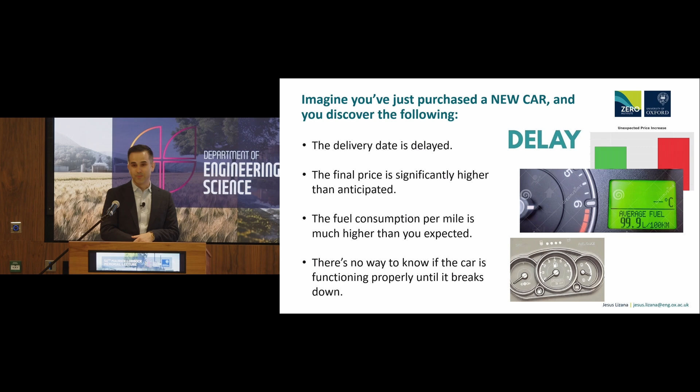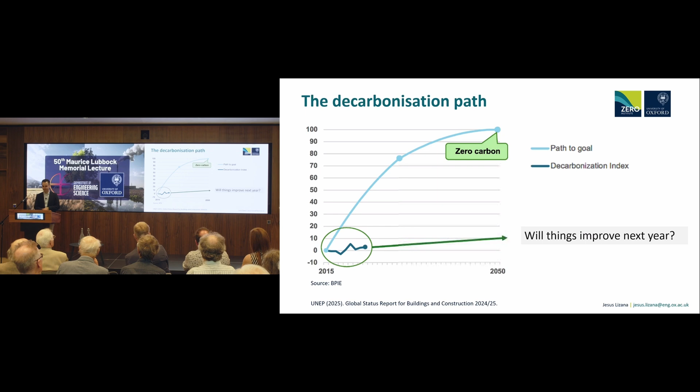Welcome to the building sector - probably the worst sector to decarbonize. We are not even close to the right path to reach net zero by 2050. We didn't even start. So will things improve next year? Sadly, the building sector is responsible for a third of carbon emissions globally: 27% related to building operations, what we call operational carbon, and 10% related to materials and construction, the embodied carbon.

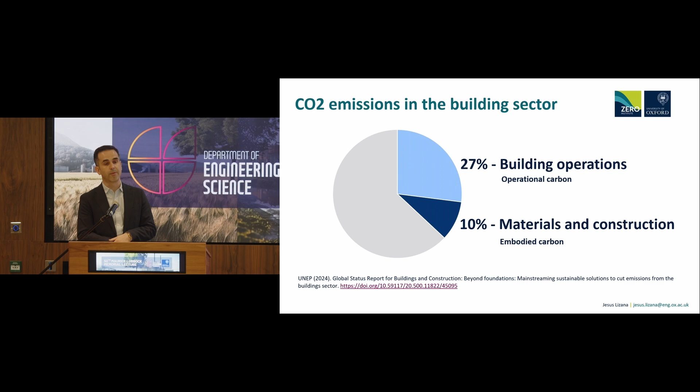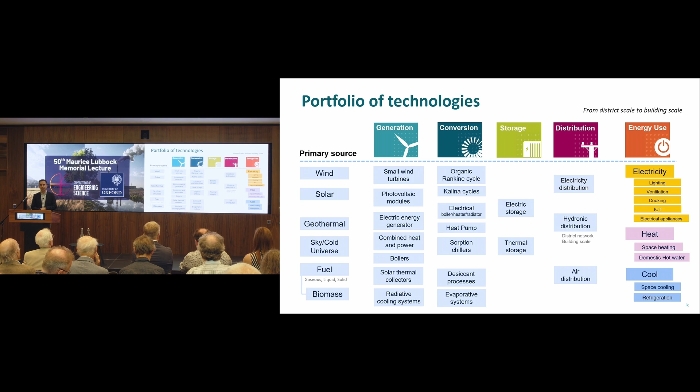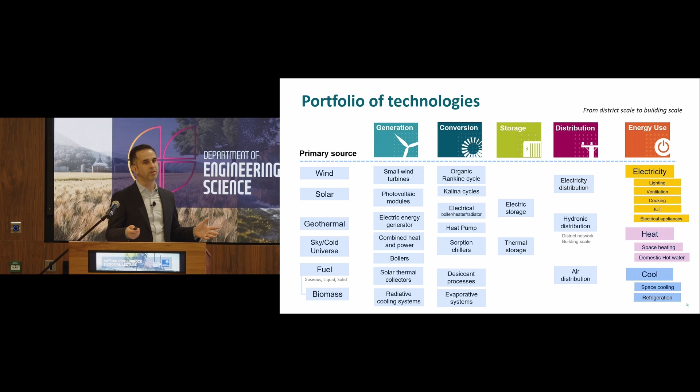What is the role here of building services engineering in achieving net zero in the building sector? We have a large portfolio of technologies that we can apply: for generation, conversion, storage, distribution, and energy use, for electricity, to provide heat, and to provide cool. But is it just about one technology? Is this going to solve the problem? If we need to talk about one technology, probably heat pumps will be the one we are all talking about - it's the technology with the highest efficiency, probably the most promising technology for heating and cooling in the building sector.

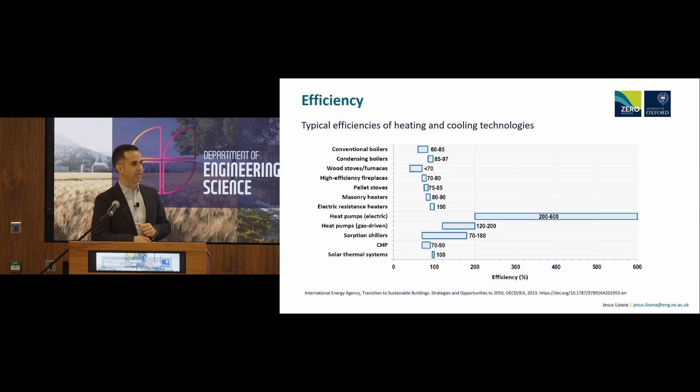Of course, as an academic institution, we have the role to share best practices with our students. This is something that at the Zero Institute we know well, and we are starting. We started last year introducing new courses, new lectures, not only in engineering but other MSc programs in engineering and geography, and even planning field programs and executive education. We also are creating educational resources, publications, software and tools in order to promote education, to train the future engineering leaders for net zero.

At the same time, we are motivating students to try to develop innovation in the sector. Now we have three fantastic students representing the UK team for the European competition on zero carbon data centers, where I hope that they will win. They will submit the proposal in July this year.

This is an initiative that we started last year and was globally recognized by the two major chartered institutions on building services engineering. First, CIBSE, the Chartered Institution of Building Services Engineers, based in the UK, with the CIBSE Award 2025 in Learning and Development, and also by ASHRAE, the American Society of Heating, Refrigerating and Air-Conditioning Engineers, with the ASHRAE Award for Zero Carbon Education.

But is this enough? Are the best practices in the building sector enough to be net zero? Is it just a question of investing, of sharing knowledge, or implementing best practices?

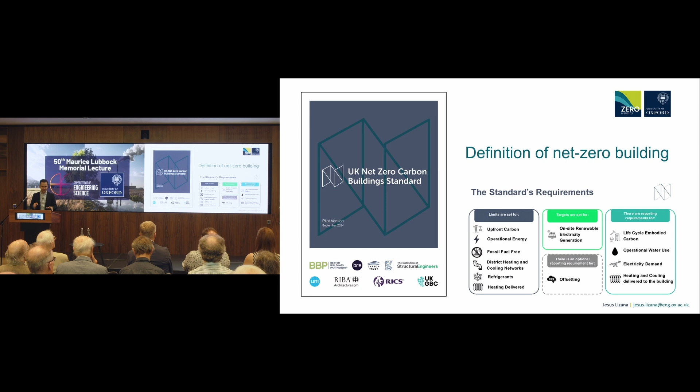Before going into detail to try to answer this question, what is a net zero building? We have a new standard that defines the limits, targets, and requirements that we need to meet in order to align the building sector to the UK net zero strategy. Something interesting about this standard is that we don't need to eliminate carbon emissions.

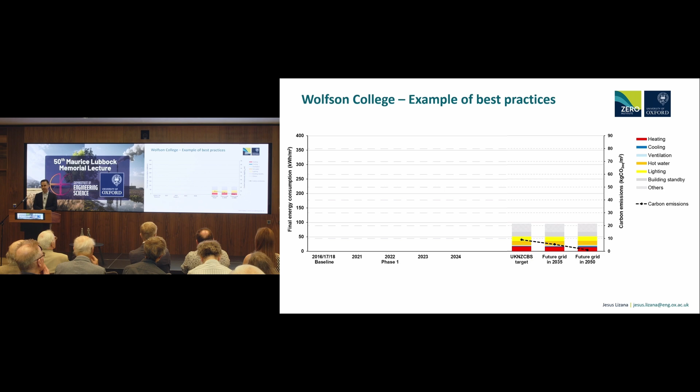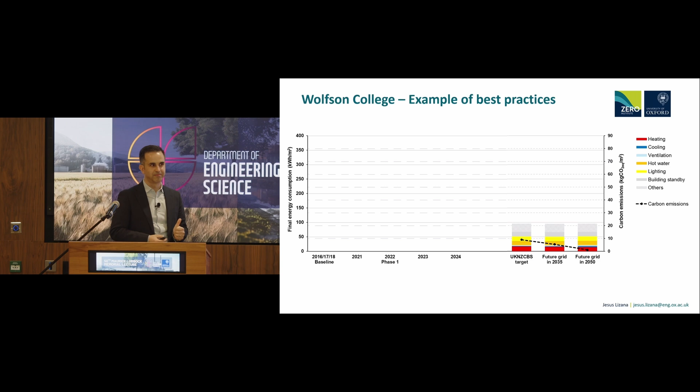How much is the consumption of a college in Oxford? Do you have any reference value? Of course, lower than 400.

Wolfson College's baseline was slightly close to 350 kilowatt hours per square meter. This is an average across three years. 2021 - what happened? COVID. So the starting point of the intervention wasn't really there; it was in 2022.

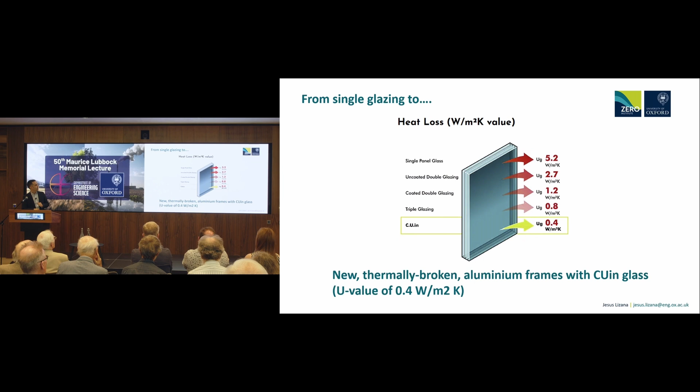And here we selected the two best practices in order to decarbonize: building fabric and the best heat pump technology in the market. Building fabric, in this case - this is a brutalist architecture - most of the building envelope is glazing, so we used the best glazing technology in the market, able to reach a U value close to 0.4. And the best heat pump technology, we have a heating capacity of 2.4 megawatts.

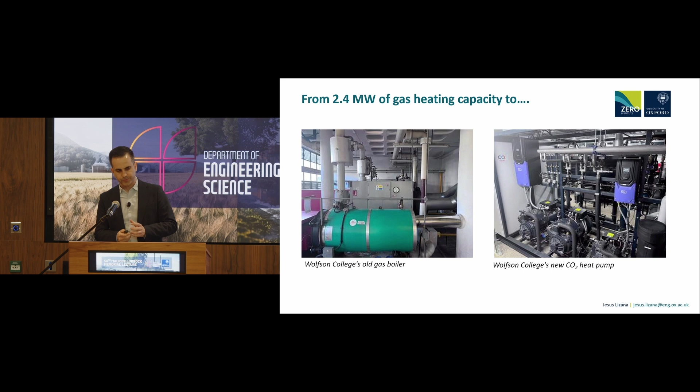We were able to electrify using two CO2 heat pumps with a total capacity of 700 kilowatts. Do you think that we are close to the target? How many of you think that we are below 150?

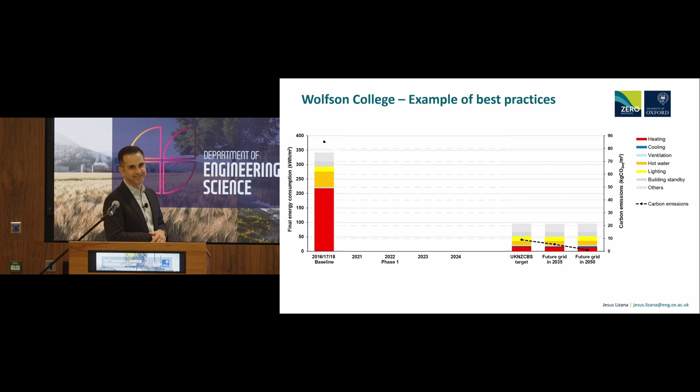Come on. Well, in 2021, as I said, COVID and the lockdown led to a decrease in consumption. In 2022, we started the decarbonization project - of course, at that time we still had gas. We finished the decarbonization process in 2023. 2024 was the reference year where the building was working fully electrified, only with the heat pump, with no more gas.

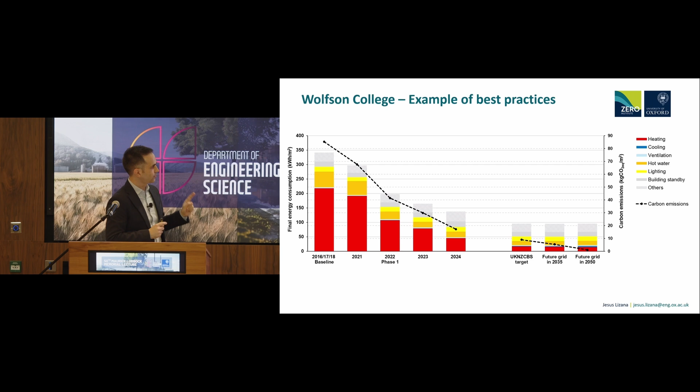What can you see here? Massive investment, very complex project, best technology - not enough. So the best practices alone will not get us to net zero. So what can we do now?

Of course, here is where, as a research institution in the Zero Institute - this is the program I'm coordinating on zero carbon heating and cooling - I have research on new materials and technologies to decarbonize heating, to understand how climate change is going to impact heating and cooling demand globally, and at the same time how to define ultra-low-cost cooling technologies to support climate adaptation.

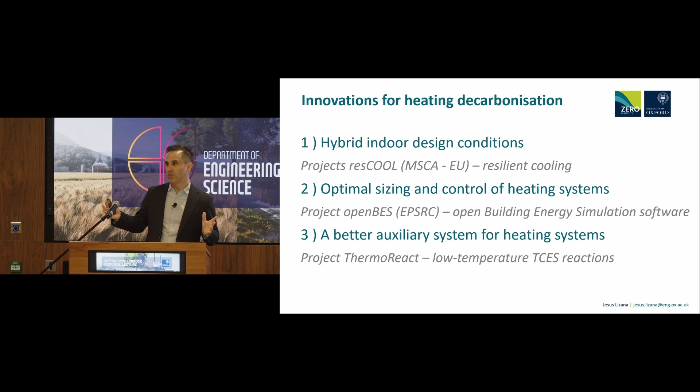But here I will focus only on climate change mitigation, on heating decarbonization. This is the hot topic right now in Oxford and in the UK. And this is not research that I'm doing alone. Research over the last 10 years has collaborated with more than 65 international academic and non-academic institutions, with contributions from many of the colleagues working with me at the Zero Institute who are here today.

So briefly, the three most exciting projects. I am sure that you all have a home, maybe planning to buy a heat pump.

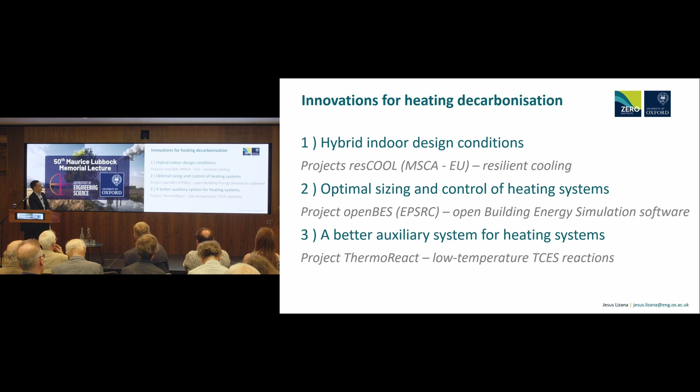I hope these three radical ideas can inspire you. The first one is hybrid indoor design conditions, a Marie Curie project we started two years ago. The second is optimal sizing and control of heating systems, a new EPSRC project I started last year, and a better auxiliary system for heating systems. I am going to go through them.

The first one is about this key message: thermal comfort is not only temperature.

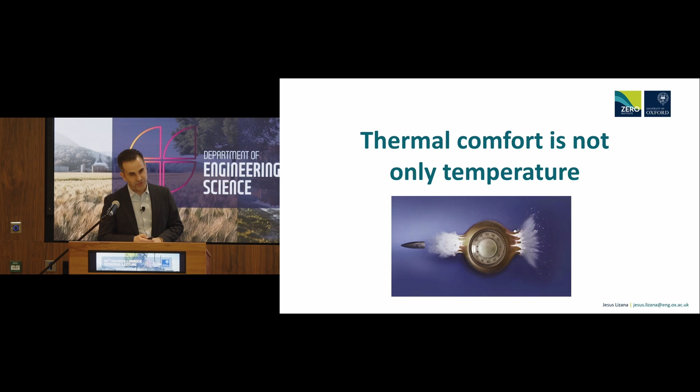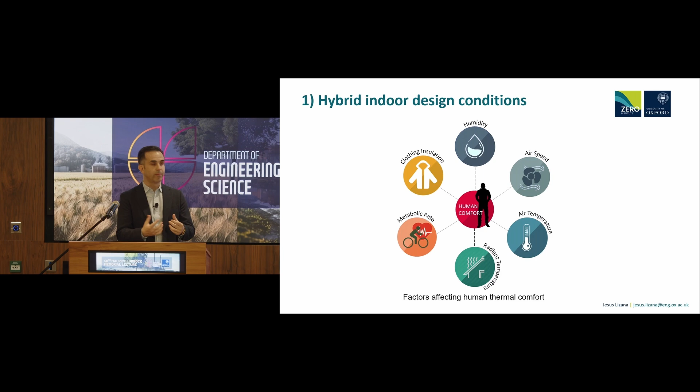We traditionally address heating by modifying the dry-bulb temperature, the temperature we see on a thermostat. But there are six thermal comfort variables we can use: humidity, air speed, air temperature, radiant mean temperature, and two personal variables: the metabolic rate according to activity, and the clothing insulation, the layers we are wearing.

What is the opportunity? For every degree Celsius we decrease the thermostat, we can save between 5 and 10% of heating energy demand. This is huge. It's a huge opportunity.

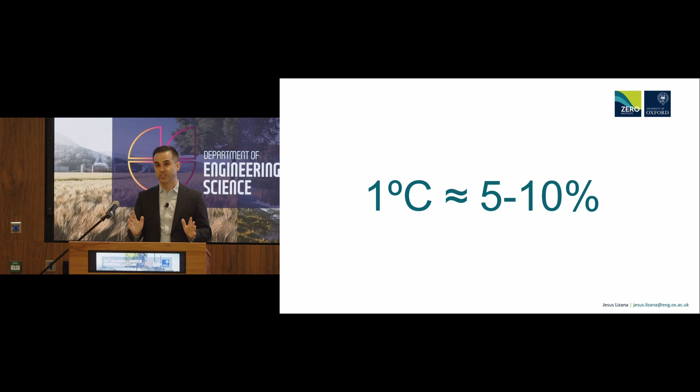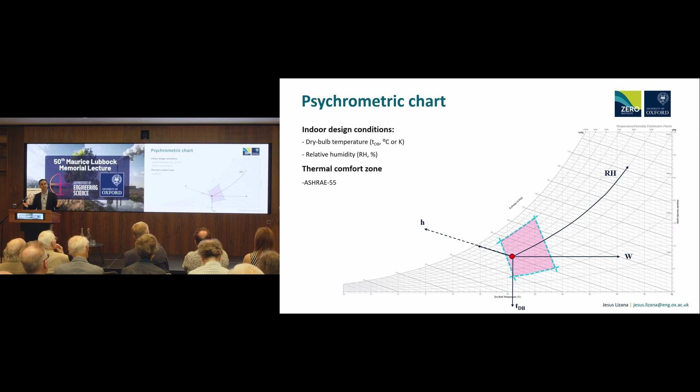Here we need to talk about psychrometry. Psychrometry is the part of engineering that studies the physical and thermal properties of moist air, a combination of dry air and water vapor. The psychrometric chart is the tool we use for sizing and calculating heating, ventilation, and air conditioning systems.

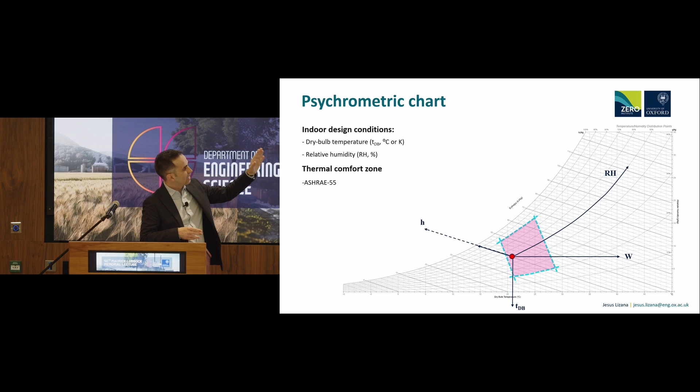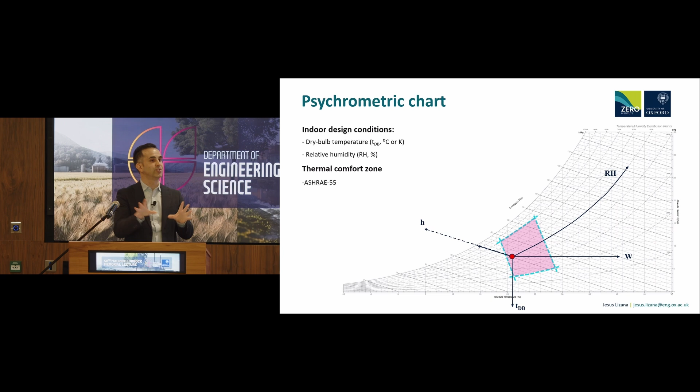On the horizontal bar we see the dry-bulb temperature, and the relative humidity as lines going up. The red point is associated with the indoor design conditions we need to meet for our heating system, and the pink area is the comfort zone, more or less where we may feel comfortable.

How do we calculate the heating system capacity? We need the outdoor design conditions. These conditions are related to a percentile of the historical temperature. For Oxford, minus 5.5 degrees Celsius, or minus 3.7 degrees Celsius, according to the percentile we are using and the building typology.

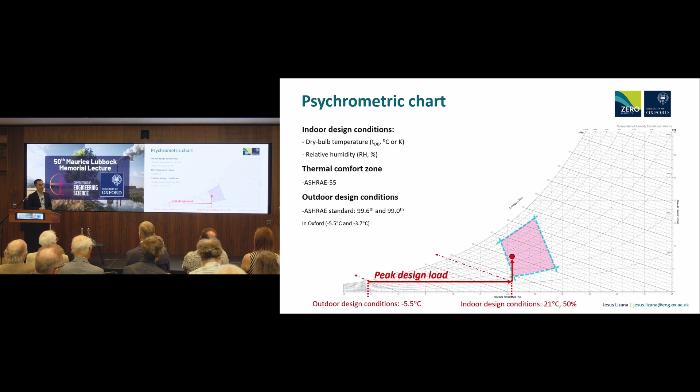Can we do this without sacrificing comfort? This will be super interesting, because we can reduce energy demand easily by 30%, and we can reduce the peak load for the heating system.

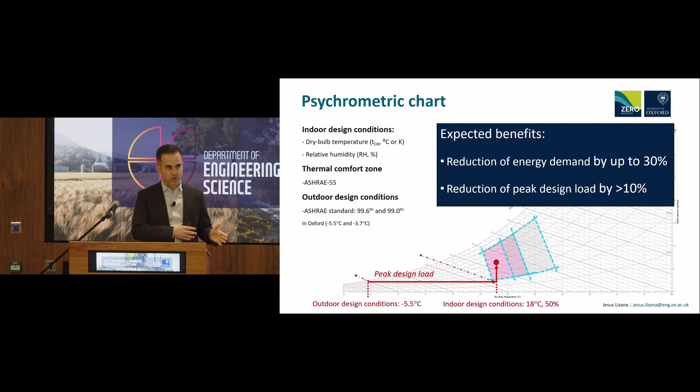But at the Zero Institute, we have a solution for this. I will explain.

What we can measure can be controlled. So first we need to understand how we can measure thermal comfort, and we can do it. We built a device that we can use to measure all the thermal comfort variables, using the predicted mean vote index.

This is not new, it's from the 70s. This is an index from +3 to -3 where we can characterize the thermal comfort sensation. Zero is the neutral zone, the perfect point, and the neutral zone goes from -0.5 to +0.5.

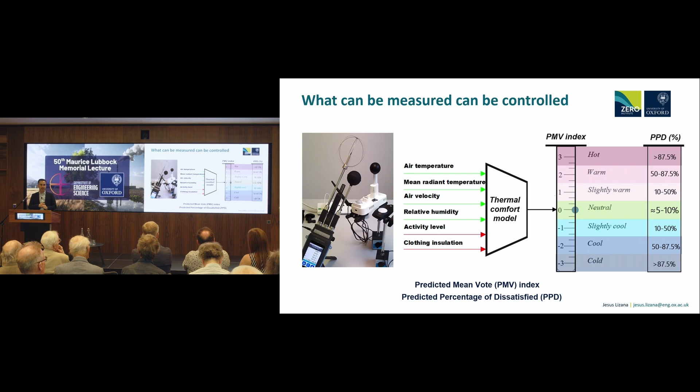Something interesting is that with this model we can also predict the percentage of dissatisfied people. So even in the neutral zone, 10% of people will be dissatisfied. We need to remember this.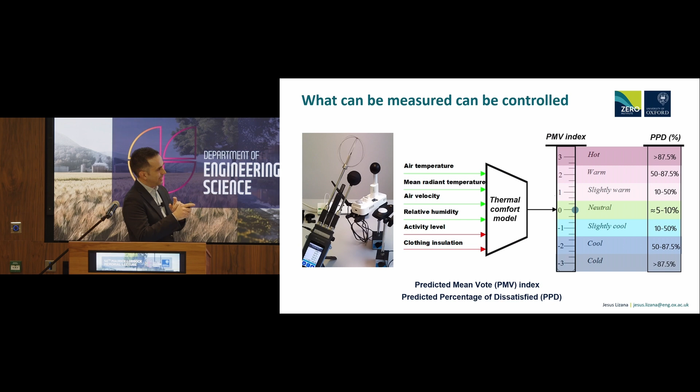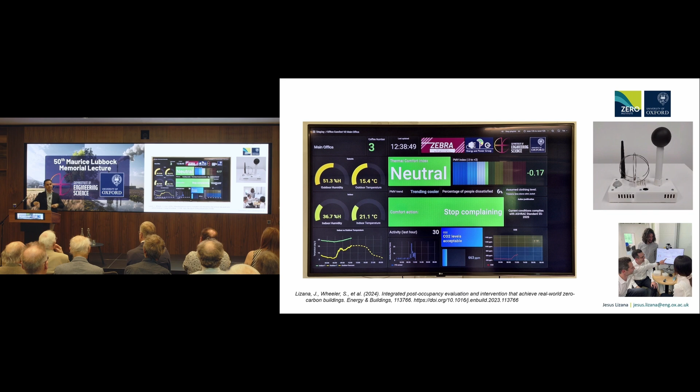So the second thing, after you measure, you need to inform these people: they have the right to complain, but not the right to modify the settings. That's clear. As soon as you understand you are in the thermal comfort neutral zone, you can start playing with the system.

You can move from the traditional approach to address heating to a hybrid approach. In the psychrometric diagram, now we can plot the thermal comfort sensation, and the white area will be the neutral zone.

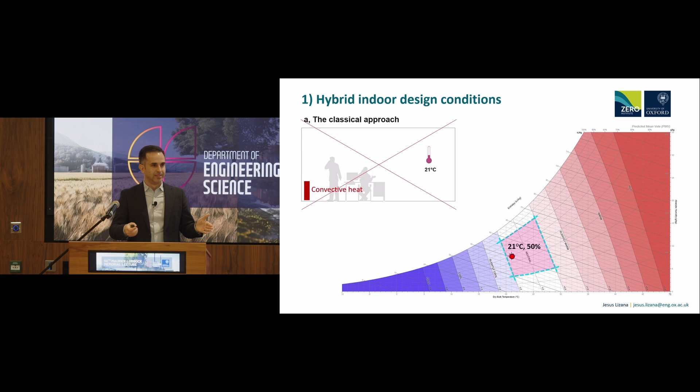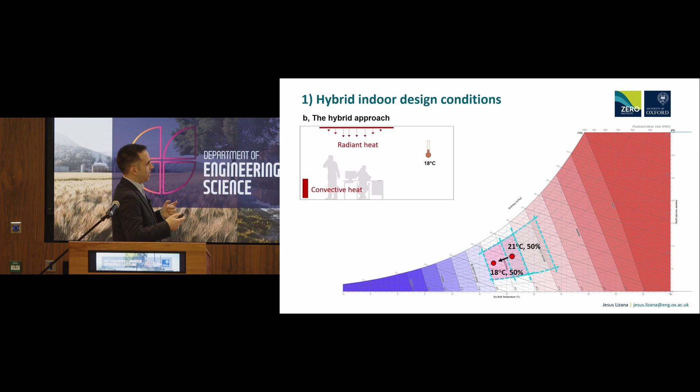How can we move from the classical approach to a hybrid approach? The secret is using radiant heat, for example introducing infrared heating. This increases the mean radiant temperature and moves down the neutral zone, basically reducing the dry bulb temperature at which we feel comfortable.

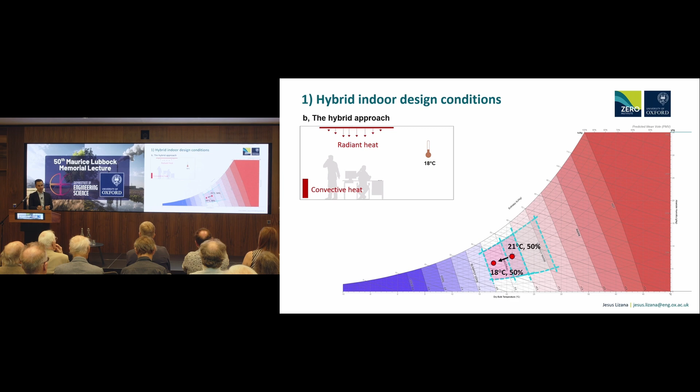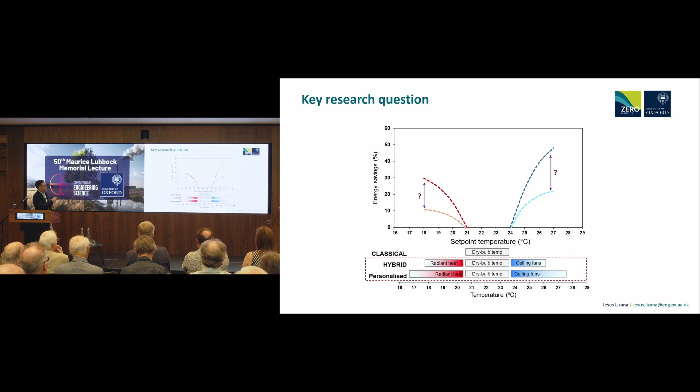And the opportunity is huge. Right now we understand there is a potential benefit if we move the set point temperature from 21 to a lower value. But we need to balance the consumption of this radiant heat to make sure there is a net benefit. This is where we are.

Do you know why in Spain we have siestas, naps, at the hottest hours of the day?

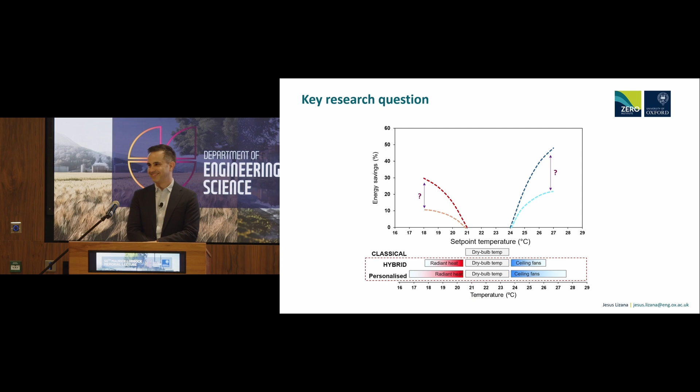It's quite fun. When we sleep, we reduce one of these thermal comfort variables: the metabolic rate. So reducing the metabolic rate, suddenly we are increasing the thermal comfort zone to a higher temperature. So when we sleep at the temperature that we feel comfortable, suddenly it's 27. So it's not because we are lazy, it's just because we need to reduce the metabolic rate. Remember that.

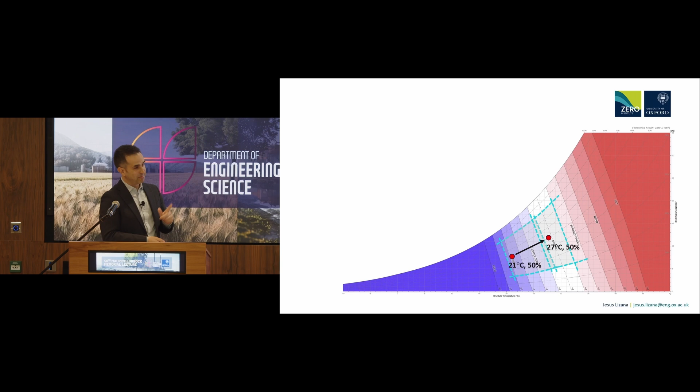The second project is about understanding this key message: it's time to stop over-engineering systems for managing peak loads. This is super important. After 10 years of experience in the building sector, we can see how energy systems for heating and cooling are traditionally oversized by a factor of 1.5 or 2, easily. With gas boilers, this was not a problem, they were cheap. But with heat pumps, this is a huge problem, the price is 10 times higher. So we need to optimize, we need to calculate well how we design heating systems in buildings.

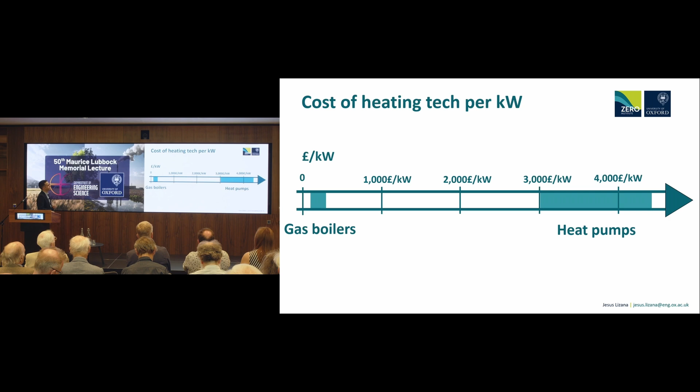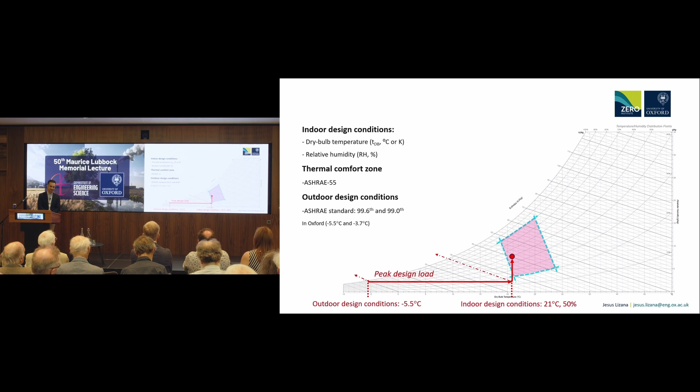Again, same psychrometric diagrams. You see, I love psychrometry. And here, how many hours in a year do you think that we reach the peak design load? Few, right? How many days in Oxford do we have minus 5.5 degrees Celsius?

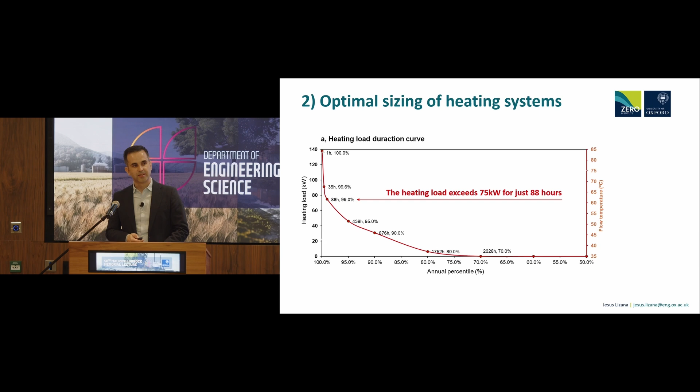Well, this is the Zero Institute. In this plot, you can see the heating load duration curve for the Zero Institute, basically how is the distribution of the load in a year, in a heating season in this case. So we can see traditionally for this building, an office building, the percentile to calculate the heating system will be the 99th percentile. And you can see the heating load exceeds 75 kilowatts for just 88 hours a year. Can you guess how much was the installed capacity? Just 100, just in case.

100 kilowatts. And here, the best practices are always the same: we normally have an auxiliary system that is able to meet a third of the load. Traditionally, it can be a gas boiler or an electric heater, because they are cheaper. And then the main energy system, also for example the two CO2 heat pumps that we have, to reach 100 kilowatts.

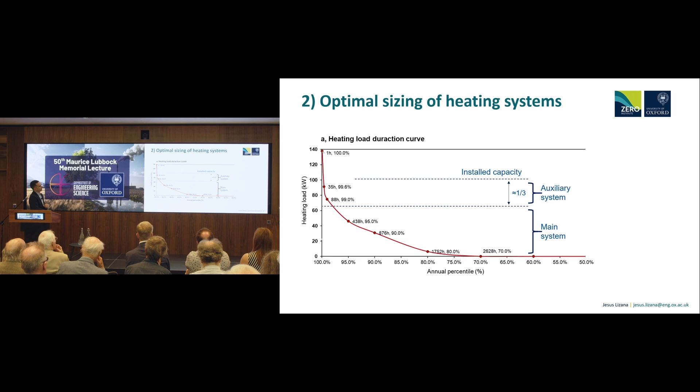The most interesting thing is that with the power of digitalization and artificial intelligence, we can change this completely. We can avoid, even eliminate, this worst case scenario of peak load. And we can run the building in a way that we never meet a load higher than 50 or 60 kilowatts. This is a huge opportunity, a huge reduction of the capital cost for the new heating system.

This is one example of the curve that we can achieve. How? Digitalization, reducing the set point temperature, increasing the temperature, basically heating the building slightly at night, introducing smart demand response to try to balance the load. So there are many strategies, and it's just about control. There is no technology that we need to implement, it's just control.

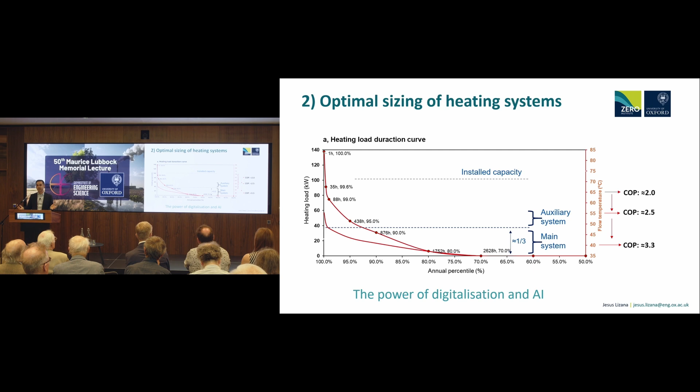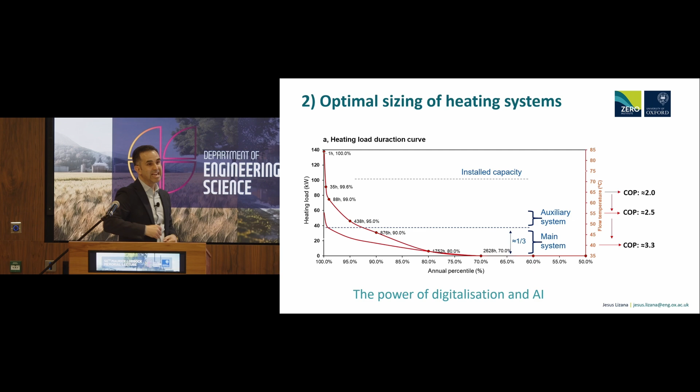Something really interesting: as soon as we reduce the load, we can also reduce the temperature at which we run the heating system. Traditionally, for gas boilers, the temperature was 70 degrees Celsius, because we needed to meet the peak load. But now the peak load is much lower, so we can run the system at a lower temperature. If we reduce the temperature, we suddenly increase drastically the efficiency of the heat pump, because for a heat pump, the higher the delta T, the lower the efficiency. So with this strategy, we can reduce drastically the capital cost, and increase drastically the energy savings. It's a huge opportunity.

So in this project, what we are doing is figuring out how to calculate these future heating systems more efficiently and in a more sustainable way. What we are creating is a software that, with minimum input values and using a physics-based building model, we calibrate the model using a data-driven calibration process with the energy bills. After that, we try to identify the optimal sizing for the heating systems, understanding and comparing all the opportunities we have to start controlling the building more efficiently.

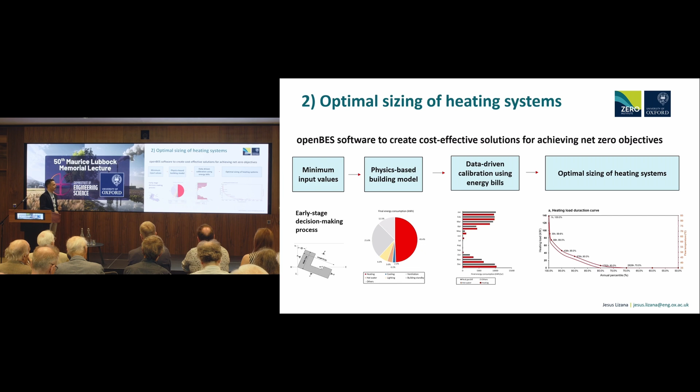The last key message, the last project, is about this: investment in an auxiliary system for just 96 hours a year doesn't make sense. I hope you agree with me here.

This is an example of best practices in a heating system, for the CIBSE journal, where we have a heat pump for heating and hot water, and an auxiliary system that we use only when we have high peak demand. How can we replace this system with another component that we can use more, not only for peak loads?

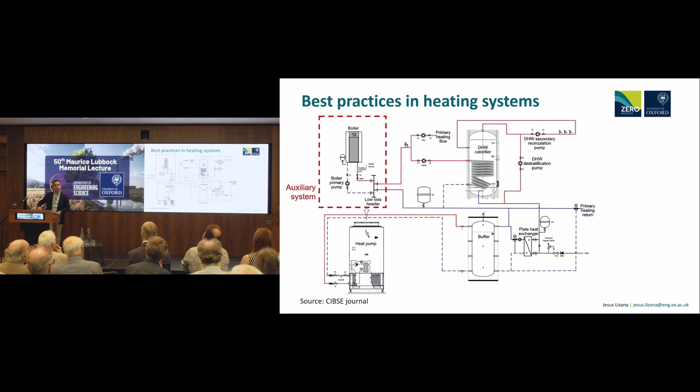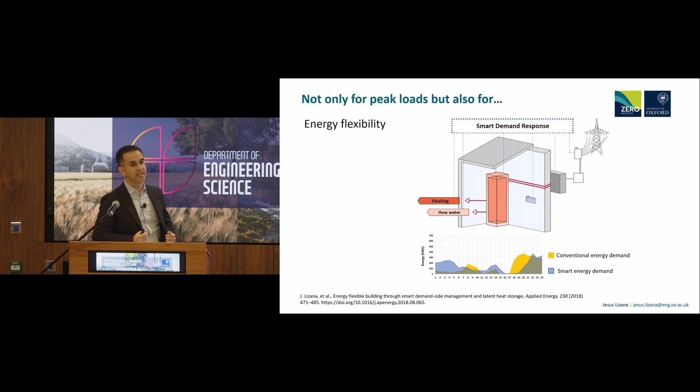Any suggestions? Where we are working is high-density heat batteries. The idea is to start integrating heat batteries in a way that they can help meet the peak load, but also provide energy flexibility to the network—a heat battery that we can use to balance energy demand and supply when we have renewable availability, while also helping the building meet that peak load.

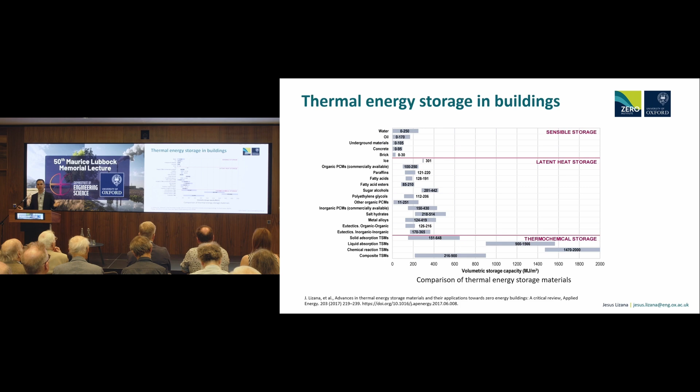What is the most promising material for this? This is research I started ten years ago during my PhD. Of course, water is the most common material we find in buildings for hot water storage. That's quite common. We also have latent heat storage and thermochemical heat storage.

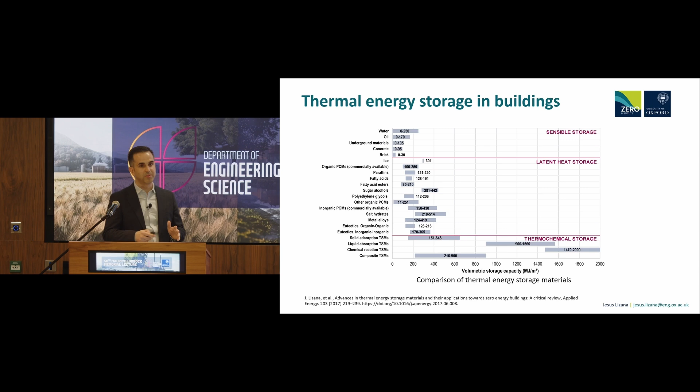Where we are now is working with solid absorption thermochemical heat storage. This is where we identify the most promising material, because there are many requirements to meet. Remember, zero carbon heating means low temperature heating—the lower the temperature, the higher the efficiency. So we need a thermochemical reaction able to charge between 30 and 45 degrees Celsius, and discharge reaching a temperature close to 50 degrees Celsius. This is low temperature energy storage.

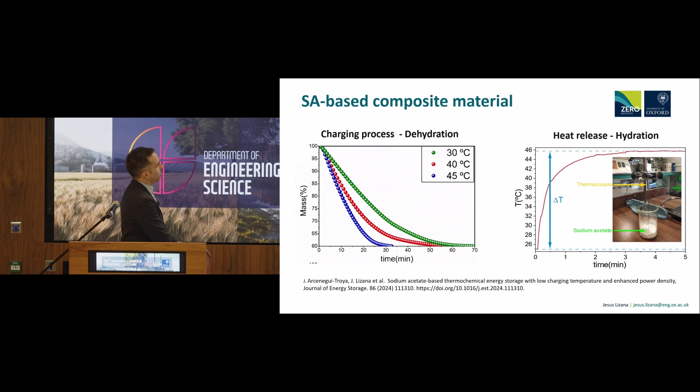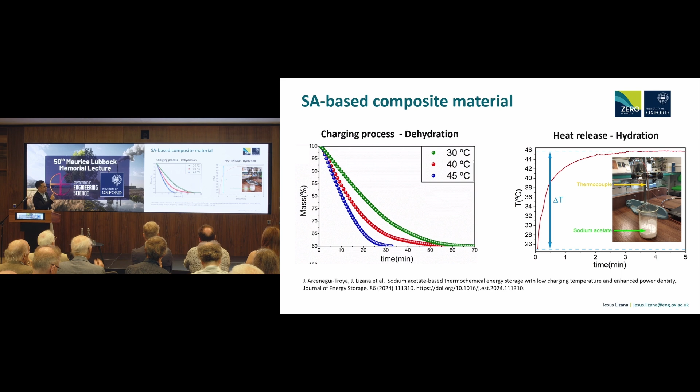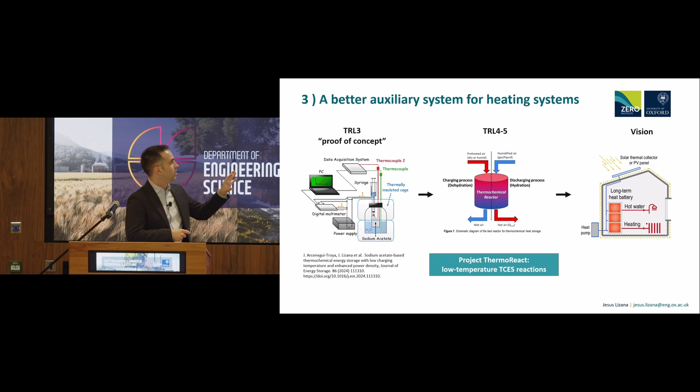We are working with sodium acetate-based composite materials that, as you see in the first figure, we can dehydrate—this is a dehydration-hydration reaction. We eliminate the water content in the first figure, even at 30 degrees Celsius, and in the second figure, by adding water, we can discharge the heat battery. We published last year the proof of concept of this technology, and now we are focusing on prototyping and developing it further.

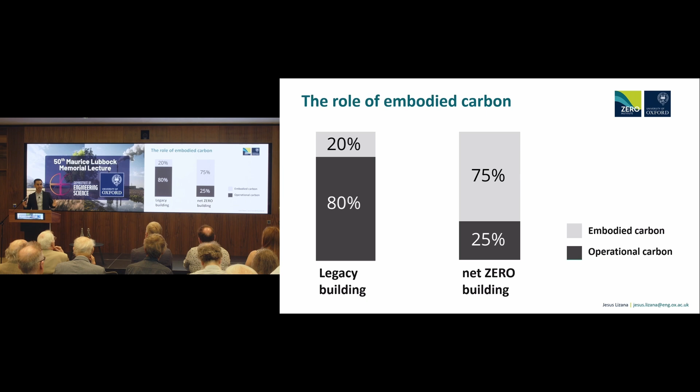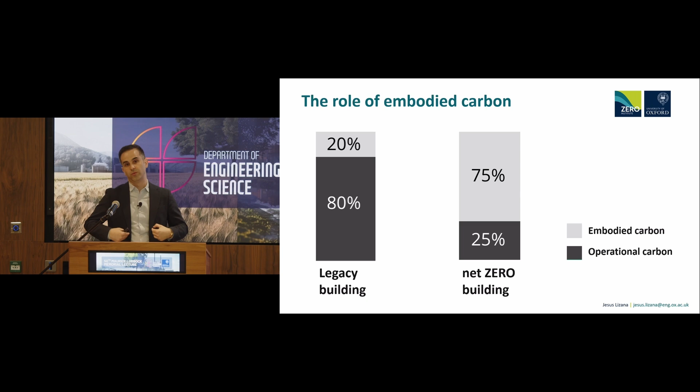From here, in the building legacy where we are right now, operational carbon is responsible for 80% of carbon emissions in a building—this is the main problem now, where heating and hot water was the highest energy use. But in the future, as we continue decarbonizing, the problem will not be associated with operational carbon, but with embodied carbon—the materials and construction processes used to build and integrate new interventions into buildings.

Here I am delighted to introduce the research led by Professor Barbara Rossi, Associate Professor in the Department of Engineering, working as an academic practitioner in the development of sustainable structures and materials for civil engineering. Barbara is a fellow of the Institution of Civil Engineers, and I will briefly explain the research she's leading.

The role of materials: what are the most common materials contributing to embodied carbon in a building? Concrete, steel, plaster, mortar—major contributions are related to this narrow selection of materials. The strategy here is we need to move away from business as usual.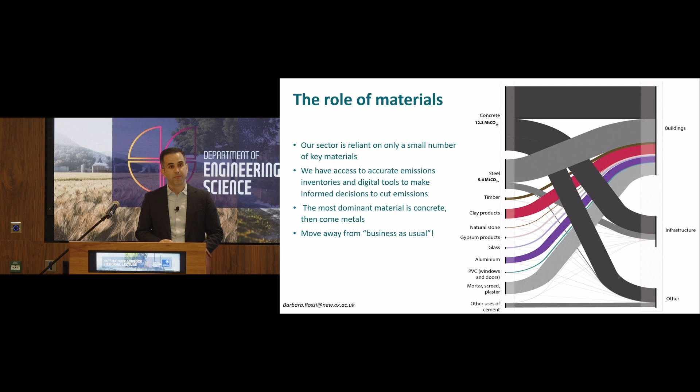As I did previously, I'm going to start with the best exemplars in Oxford. New College Campus intervention, a project of more than 5,600 square meters in the city center of Oxford, the Gradel Quadrangles, where the intervention and support in the early stages of the decision process from Barbara Rossi enabled them to reduce embodied carbon by 55%—a massive reduction.

How? Through three main components: superstructure, substructure, and the building facade. The analysis basically focused on performing a parametric analysis of different materials and different material integrations to meet the requirements needed for that specific building. With that analysis, they were able to identify the best choices to reduce embodied carbon, which I will explain in more detail.

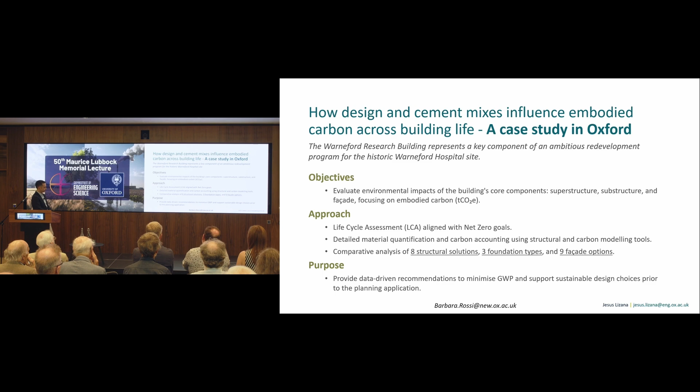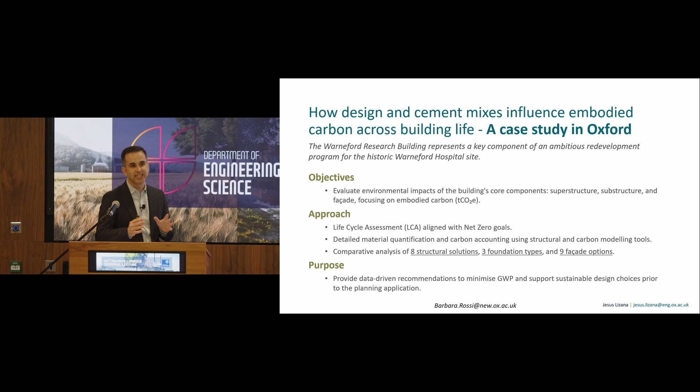This is a second example, the Warneford Research Building—an intervention on the historic Warneford Hospital site in Oxford. The process is the same: here they tried to perform a life cycle assessment to analyze different structural solutions, foundations, and facade options, in order to understand the key elements they needed to modify or suggest for the building.

There are four main key messages that I would like to share here today. We cannot analyze every single component of the building individually, so we need a holistic analysis.

We need to analyze superstructure and the substructure together in order to identify the optimal solution. Why? Basically because in lightweight structures, if we choose a lightweight structure, it will reduce the amount of material for that single structure, but at the same time, that is going to affect the foundation. That's quite obvious.

It's not only about material selection, it's at the same time about the design. So the grid size matters here. By suggesting a different structural layout for the building, they were able to save 27% of the embodied carbon for the building. So it's not only about material selection, also the structural design.

And when possible, timber-based solutions are used in order to reduce the embodied carbon, the amount of concrete or steel that we use for the building.

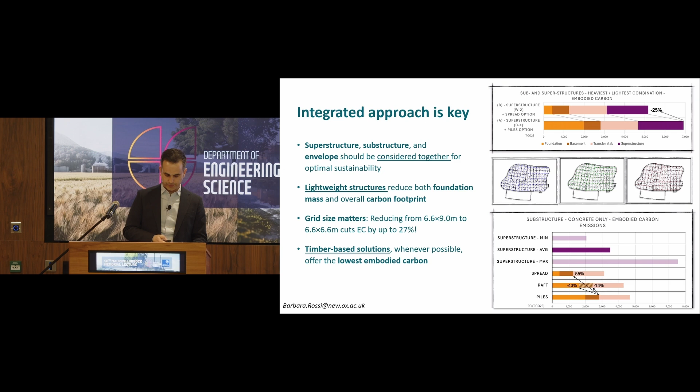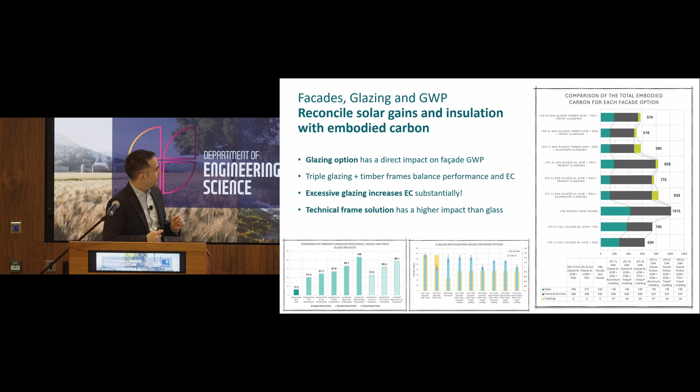For the building envelope, for the facade of the building, what were the key findings from this project? The ratio of glazing is crucial. The higher the ratio of glazing in the building, the higher will be the embodied carbon of the facade. This was quite important, as excessive glazing will increase drastically the embodied carbon of the building.

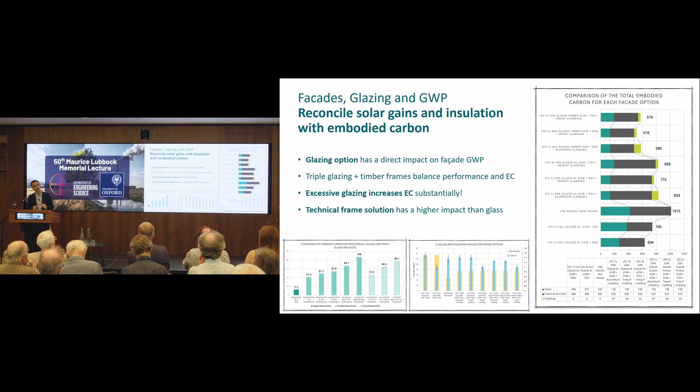The second key message is that the technical frame solution has a higher impact than the glass. So the frame selection is more important than the glass choice in order to reduce the embodied carbon of the openings of a building.

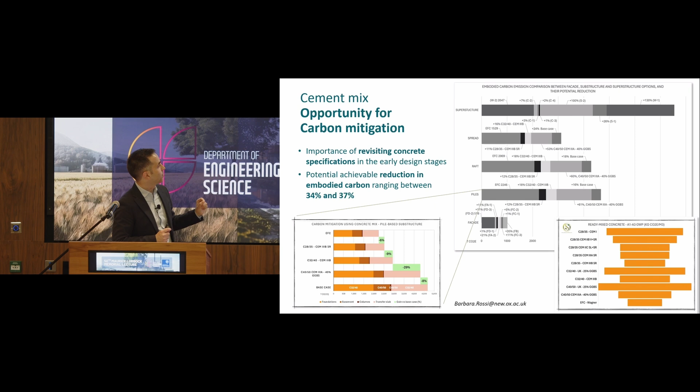The last part where they were working was how to define alternative binders to concrete, how to reduce the embodied carbon of the concrete that they use for this project. And here, the reduction was massive. They were able to reduce between 34% and 37% of the embodied carbon associated to the building project.

Again, are the best practices on embodied carbon enough to reach net zero? Let me tell you the numbers. In a legacy building, the embodied carbon associated to a new building project is higher than 800 kilograms of CO2 equivalent per square meter. With the best practices right now, we move between 400 and 650. But the new standard requires us to reach 50 by 2050. So we are not even close.

This is where Barbara Rossi is leading research, bringing innovation on new composite materials that are able to meet the same durability, the same strength, the same requirements that we need in these materials, in order to reduce the amount of material needed and the embodied carbon of these components.

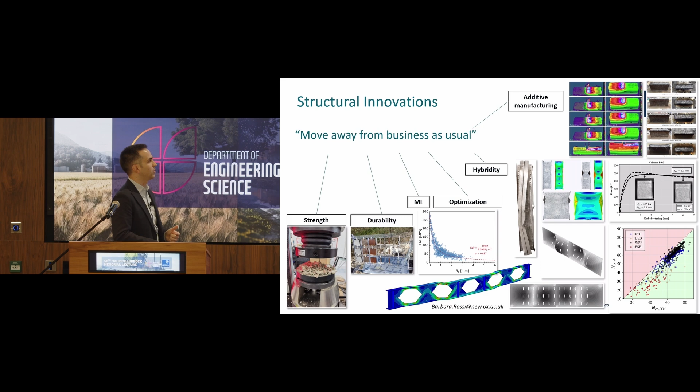I will finalize my intervention with three key takeaways. Remember, it's not only about the technology of the material—the design process is essential, and we need to move beyond the traditional practices that are holding us back. This is quite crucial. All the innovations here were based on radical innovations about the process. Technologies are the same, but we need to change how we address the problem.

The last one: we are behind, but it's not too late to change. This is something that we are promoting at the Zero Institute, with the vision of creating a working group on the future of zero buildings at Oxford.

This is an initiative that I'm coordinating, and I hope many of you can join us, because the idea is to start working together to support university estates services, but at the same time all the colleges that right now are defining a decarbonization path to be net zero by 2035—not by 2050, 2035. So the idea is that we can work together, academics and members of the Oxford community, in order to define not just best practices, but the radical innovations that are going to help us reach net zero.

I hope that together we can pave the way towards a sustainable and net zero future at Oxford, and that we can also use that as a way to scale up the radical innovations that we need in the building sector to reach the global target. Thank you very much.